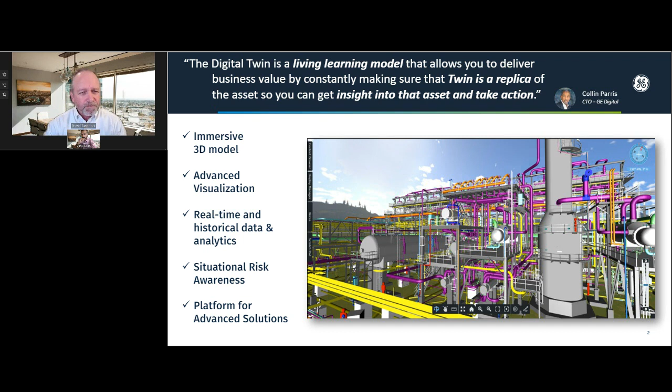And this whole platform now becomes something that we can use for other advanced solutions for other parts of the operation. So when we talk about digital twin, this is really what we're referring to from an operations standpoint. When GE and Visionaize came together, what we're delivering is the V-Suite application that integrates and provides advanced visualization in that 24/7 environment.

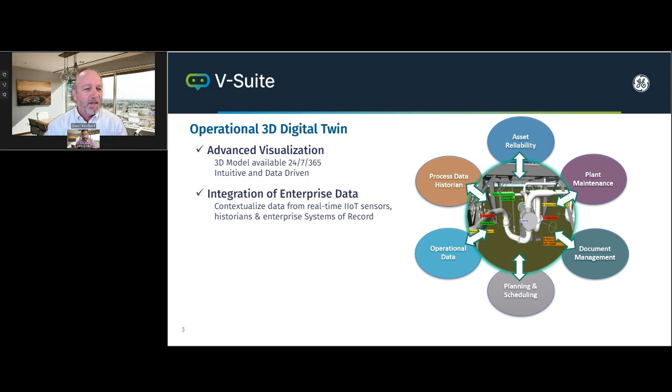So this is the operational component. Always having the data available to you online 24/7. It's intuitive, it's data-driven, and it integrates to APM and other critical business systems to provide that contextualization and the real-time awareness of different things.

This then becomes the platform where we can do other role-based things like maintenance, turnaround planning, corrosion planning, things like this. One of the things that is really important with an operational digital twin is being able to deploy it rapidly and then maintain and sustain it as the facility changes, keeping it evergreen and synchronized with changes to these complex facilities over time. All of this gives us that situational awareness, and that's what we mean by an operational digital twin and what V-Suite delivers with integration with APM and other business systems.

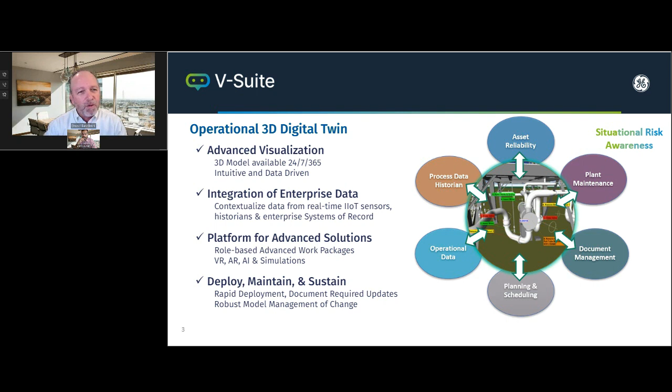So the way in which we deploy this, working with GE, we deploy V-Suite in what we call a starter. Initially, this is an integration with APM. We display corrosion loop circuits. You can locate your CMLs and TMLs, and then dynamically display and access things like damage mechanisms, corrosion rates, etc. So we can basically start small.

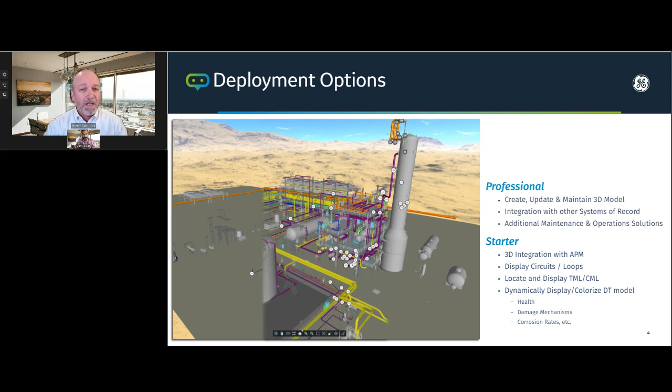We can deliver lots of great value on the starter, and then we can move this up to a pro, where we can expand to other business systems, integrate to all of those systems of record, and then add other role-based solutions like maintenance, turnaround, and other things I mentioned before.

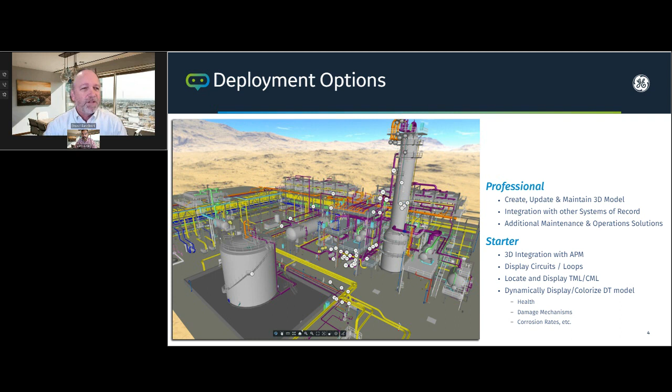At the professional level, we also have the ability to do what we call model management of change. This is where we can keep the model updated and synchronized. And then, at the enterprise level, this would be multi-site, almost a system of systems, nested twins if you will. We're also moving towards visualizing simulations, etc., at the pro level.

So we can start small, add value, and then as the solution grows or as you roll out over different locations or more assets, we have the ability to scale that very rapidly within the enterprise. So it's a great way of beginning to deploy.

So let's talk about how APM and V-Suite Visionaize come together and where we focus today and where it's going. As you know, APM has a lot of great solutions, a lot of depth across diagnostics, reliability, safety, lots of great functionality. So where we're focusing today with GE is on the integrity side.

We're focused on things like the corrosion loops, the circuits, things like this, and we're getting a lot of great traction in that area. But we're already beginning to expand that and work across other areas of data that resides within APM, things like health, SmartSignal, and other things. So that visualization really is not limited today, but today we're really focused on the APM integrity space, and that's the starter that I mentioned earlier.

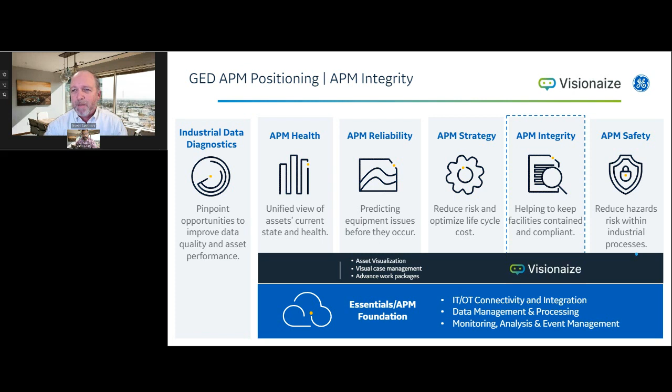So we'll give you some examples of that. Again, on the starter, we already have the out-of-the-box integration with APM, and we'll take a look at some of those use cases around risk, corrosion, etc.

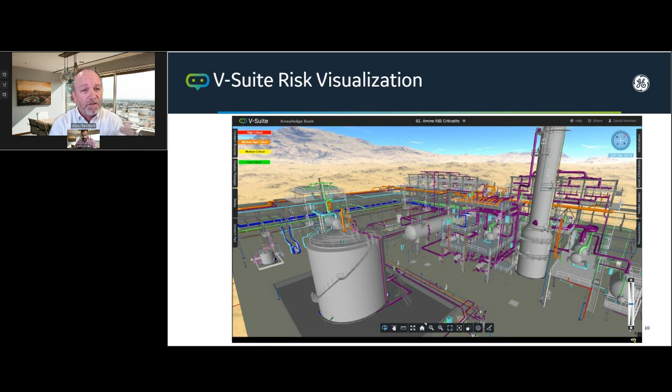Now, when we start to add the visualization, this is where the first example of where V-Suite comes in. So we have this dynamic 3D model. We can essentially query on demand that same criticality that would be coming from APM.

So we would drill into one of our asset models, and then by querying the model, we can say, okay, show me the risk matrix, show me the probability and consequence, or the different risk categories that I have in APM. Through the display manager, we're reaching in, getting the data, and then displaying that based on color codes or however the user defines it. So this is an example of how that visualization would look using the APM data directly within V-Suite.

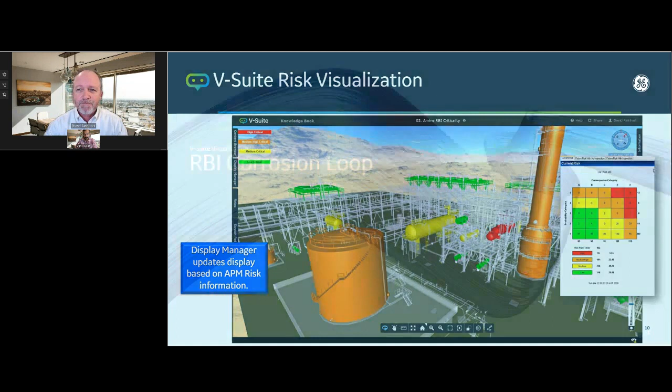So the next example we have as part of Starter would be the corrosion loop. Again, we're focused on the mechanical integrity pieces. So inside of APM, we have the loop overviews, the damage mechanism, the loop details, things like remaining life, minimum thickness. So all the good data you need to manage these assets and manage risk.

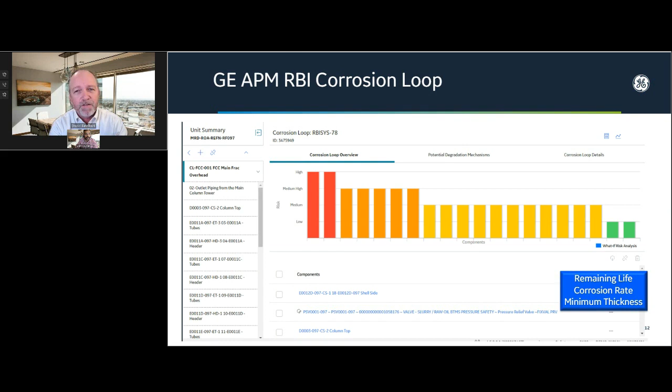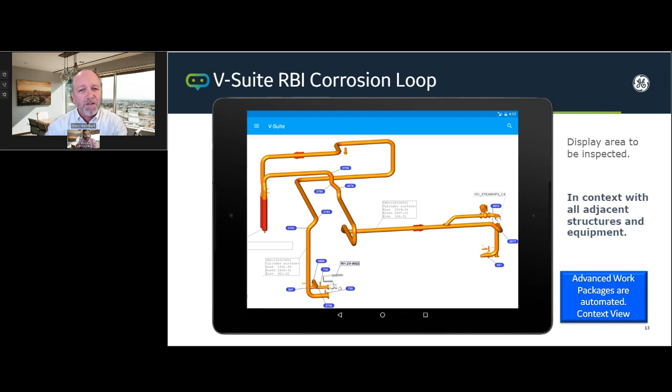Now let's take a look at that same loop inside of vSuite. We have the circuit identified, end-to-end, the dynamic 3D model that has all of the assets, the TMLs, etc. What really makes this more valuable is this data all resides within the context of the facility. So we get to see the adjacent structures, the adjacent loops, other things in the area that can help us plan, execute, and then analyze that corrosion data.

This is really important, because putting it into context with the rest of the facility, we have clients in this space telling us an hour in vSuite working this way is like 8 hours in the field, walking the lines down, tracking it, understanding do I need scaffold, how do I access it, all these kinds of things. So we're really helping them not only understand the loops, but plan that work for themselves, their contractors, and then analyze the data afterward.

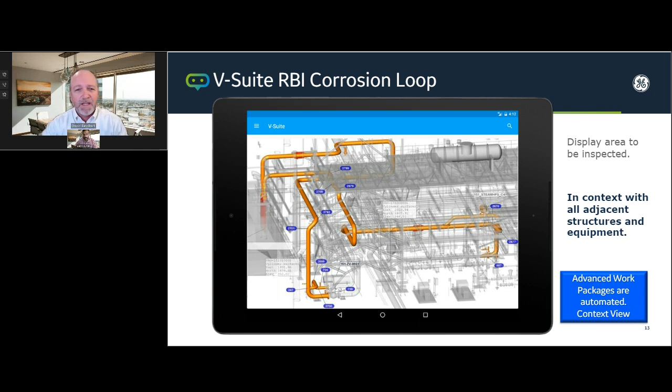Looking at the loops, we can also configure different kinds of symbology, for example different color coding to show dead legs, different symbols for things like UT and RT readings. And all of this is dynamically displayed based on what kind of work has to be done and the timetable coming out of APM.

This is part of what we call an advanced work package, and this is the contextualized view available to users on the web, either in the mobile application or at the desktop. So this is all part of that knowledge view available to the end user.

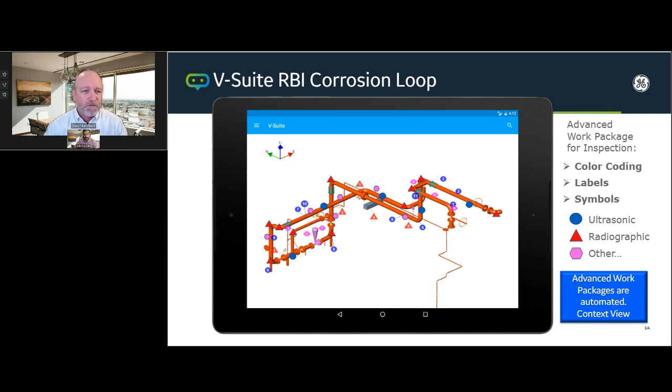We talked about it a little bit earlier. When we think about the loops, we also must think about the asset thickness data, the TMLs, those readings. We see the TML IDs, all the good data that exists, corrosion rates, remaining life, all based on the assets and based on the loops inside of APM.

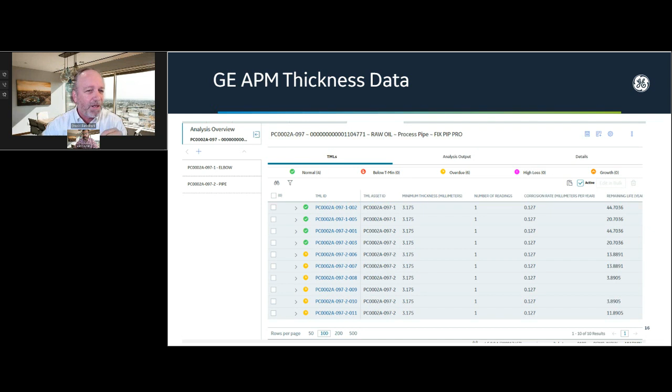Now let's take a look at that same loop, that same circuit, inside of vSuite. We can interact with the model now, and we can click on a TML, for example, select one of these TMLs, and then dynamically reach directly inside of APM and access all of that same data while viewing the circuit.

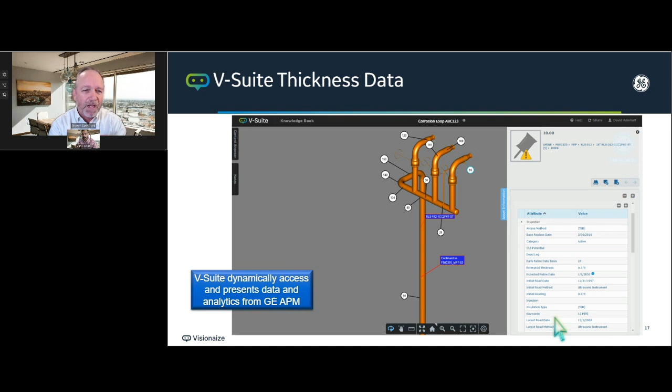And again, this can be done in real time. We're not replicating the data, so as information changes and gets updated in APM, it's automatically available in real time within V-Suite. So we can dynamically access that data, understand what we have to do, how we have to inspect, etc., all in a dynamic 3D model. These are some of the initial use cases we see with Starter.

So we'll move to some of the professional, or the pro, examples. Go ahead, Vipin. David, just wanted to add before you get into the professional, if you can go back one slide, just quick.

One thing which is really powerful is that even though in APM we have multiple modules, like thickness monitoring for managing corrosion rate management, RBI for calculating the risk, inspection for managing the findings and recommendations, one thing we can do is consolidate information. So when you're looking at an asset, like let's say this is the 3D digital twin of that asset, we can combine all the information coming from APM in one place. It could be anything ranging from RBI, TM, and inspection.

And as I said, we can expand even into the work history that is coming from your CMMS system. So you have it all in one place, rather than navigating between multiple databases. Again, consolidating information with context just makes the life of an analyst, an inspector, or a planner a lot easier than it is today. It can be expanded across multiple workplaces, and it's truly a 3D digital twin of that asset - a 360 view of that asset.

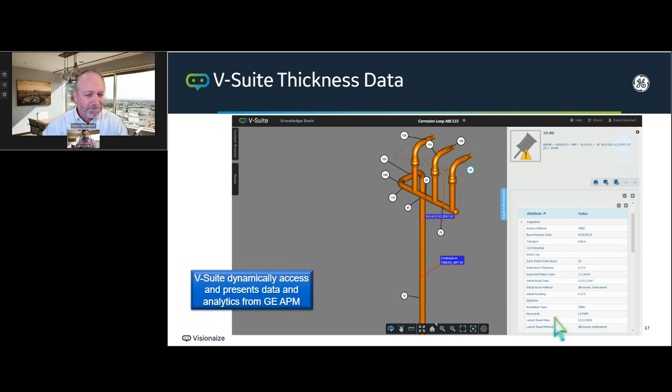Let me jump ahead, then we'll move on to some of the pro features we talked about, then other integrations. When we talk about other kinds of use cases, we really think about an operational digital twin as providing role-based access to meaningful data. It's the data I need to accomplish my work, whether I'm planning or executing a maintenance and operations routine. Maybe I'm a contractor, a new operator. How do I access the data I need to do my work and go from planning to execution, or incident to resolution? So we'll talk about some of those other use cases.

One of the first ones we often think about is an operational use case where we might look at real-time data. Maybe we have sensors or access to things like pi tag data or some IoT information. Those sensors can be placed directly in the model and integrated with that live data. And then we can visualize based on queries.

We can say, for example, show me my assets that are operating normally and color code them green. If I'm having some excursions or irregularities, highlight those in yellow. And if I'm going outside of my operating windows, highlight those in red. These are the kind of queries I can visualize, going from dashboard to really dynamically visualizing and understanding which assets are being affected, maybe which sensors are the key indicators or outliers, and what assets are being connected and affected. So this would be one of the operational access or operational visualization examples.

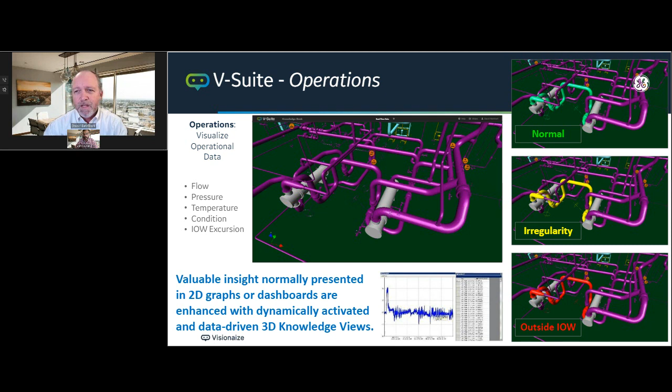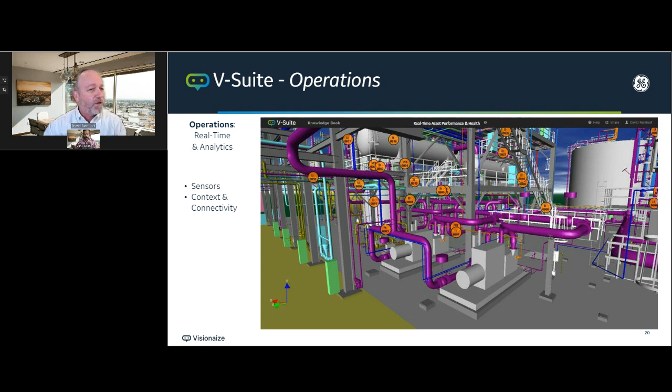Taking that a bit further, we might look at real-time data and analytics, and think about how we might work with SmartSignal or visualize other kinds of data. So when we drill into our operational model, one of the things we could do is say, show me where the tags are, and then maybe overlay that with the risk criticality, the health, or certain damage mechanisms, whatever kind of query I wanted to look at.

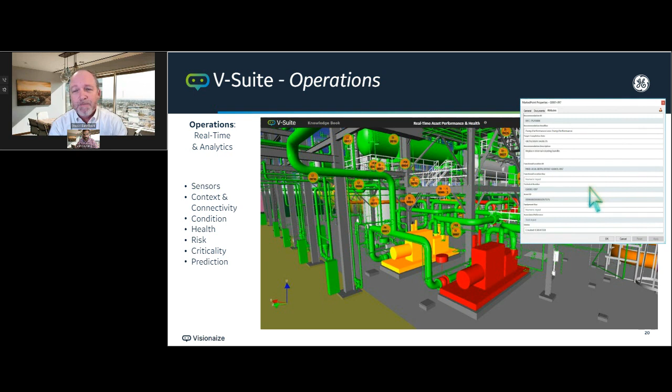So this might be a query that says, show me real-time data and show me the health of these different assets. And maybe I have some problems going on with this pump. So drilling down, I might drill into this. And to Vipin's example earlier, maybe I could reach in and get a recommendation or a prediction of failure, or some other information coming out of an APM or SmartSignal type solution. These are all the kinds of data I can bring together in a single view to really get that situational awareness we were talking about, from an operations, maintenance, or planning perspective.

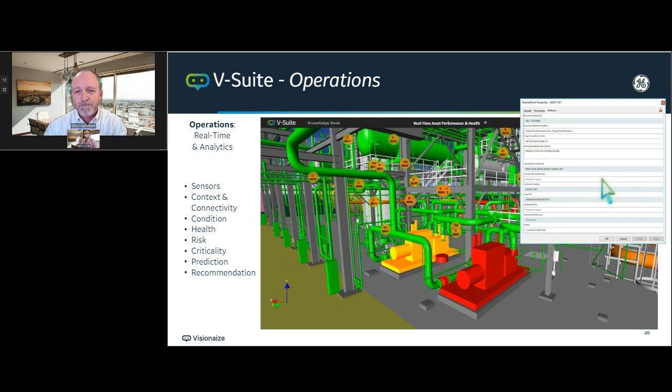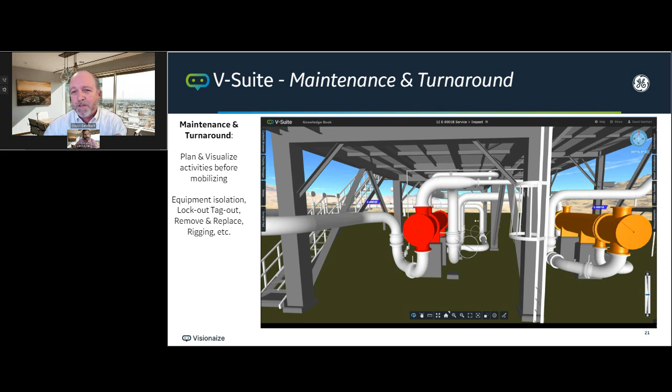As we see a retiring workforce or new contractors coming in, understanding what's the best practice when I have to maintain or work with this asset? How do I go about isolating that, and what is my procedure? Oftentimes this exists in our maintenance programs, we might have it in SAP or other applications, so what is the process to isolate this and perform that activity?

We can actually show those steps directly inside of what we call a knowledge view. We can have integrations to the interactive technical manuals or other information sources that would allow us to have certainty with which we would go about and make those maintenance activities.

What I like about this example is this exchanger here is color-coded red, there are some issues with it. But we can see the exchanger right next to it is already color-coded orange, there's beginning to be some problems. So the planner might look at this and understand, hey, if I'm going to service this one, I'm going to have people, resources, and production halted for a while I do this work—we might as well do the one that's adjacent during this planning phase. So I get that context and I'm able to do that.

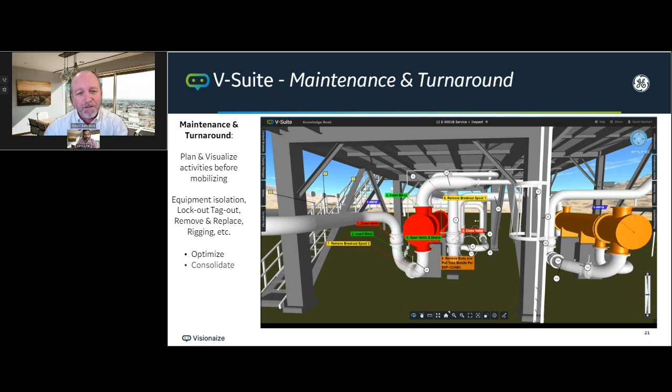I can also look at maybe the TMLs in this area. Since I'm going to have these pipes out of service, I might as well inspect those. So that's all part of that knowledge capturing and sharing, extremely intuitive and consolidated within the digital twin to facilitate things like turnaround planning or regular maintenance activities.

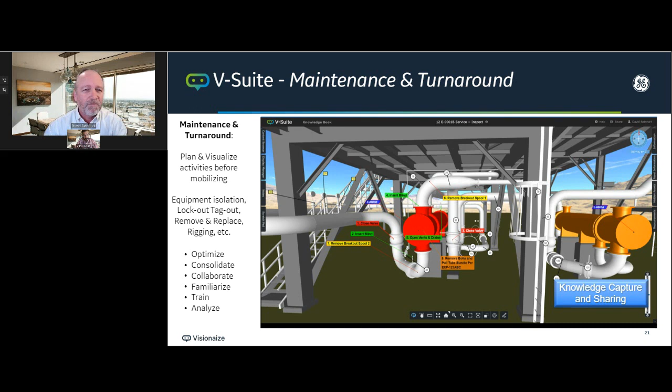So when we look further at those two exchangers, we can also reach into other kinds of data. With these, we support what we call temporary assets, and these are also data driven. So when we think about planning activities around these exchangers, one of the things we might need is scaffold.

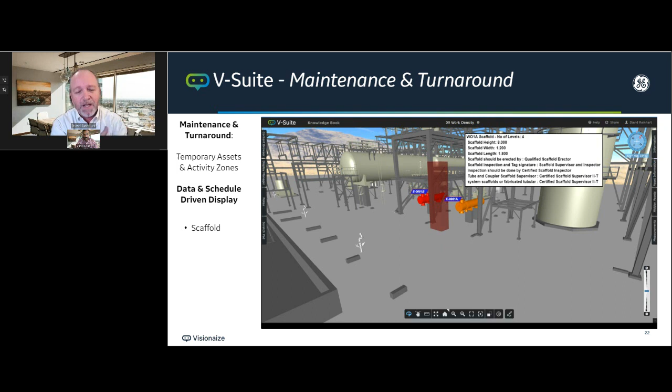With our maintenance module as part of Pro, we can locate scaffolding and have those locations tied to a schedule. So if the scaffold is erected and signed off, it can be visualized in the 3D model, and then we can see, okay, I have some scaffold here. I might also want to run a query that says, show me other inspection or other activities I might have planned in the next 6 months that I could take advantage of this scaffold and use that today.

So now I can begin to consolidate activities in a way that would help me optimize my execution, so I spend more time working instead of planning or moving scaffold from here to there and then back again in 6 months when I need that activity.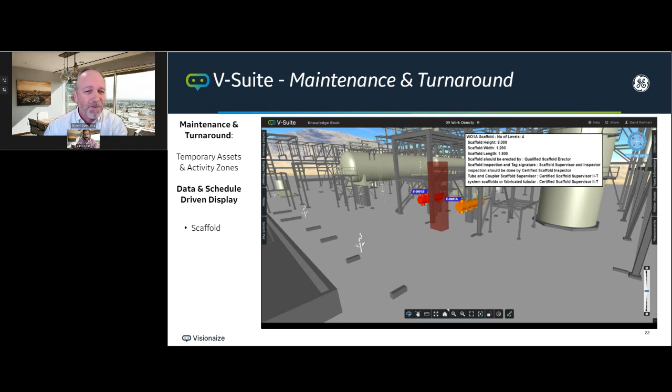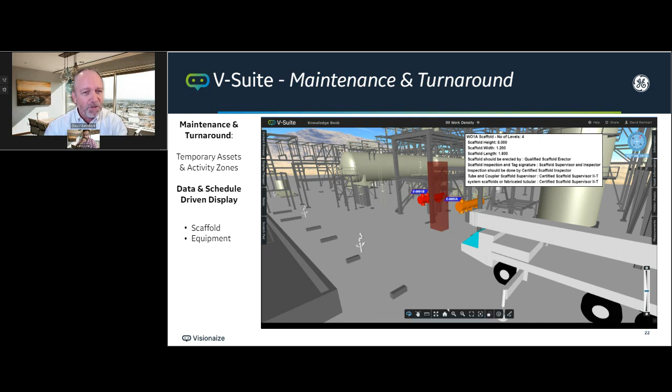Other kinds of things we can display through temporary assets would be things like heavy equipment. If I have certain equipment in the area, this can be located and shown as a temporary asset. We can move it around, show where the boom is going to be, make sure we have appropriate clearances—again, all part of that maintenance turnaround so I can communicate to my team and do my planning.

Something else we can do is tie physical work areas or safety zones to the model, and we can visualize, maybe show in green areas where I have low activity, yellow where we have moderate things planned, or highlighted red where we have heavy equipment or maybe some x-rays or other hazardous activities going on. So I can see right inside the twin these different functions. Before I mobilize, I can have a better sense of what's going on in the field and plan it, or mitigate potential pinch points or hazard areas by working around it or accessing things differently.

We have many clients actually tying this kind of visualization directly to their turnaround planning or maintenance schedules, and part of their daily stand-up meetings, viewing the model and having a real sense of what's going on in the field before getting the hard hats on and going and signing into the control room.

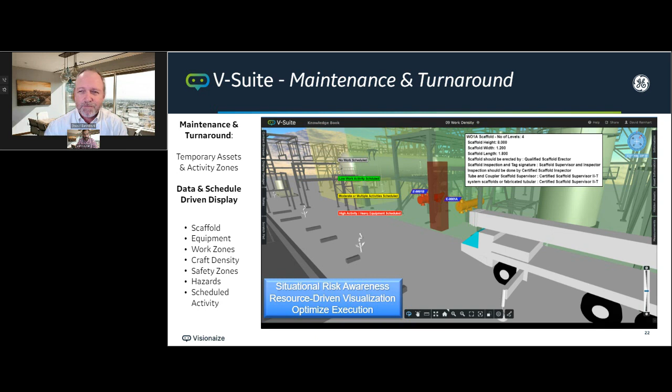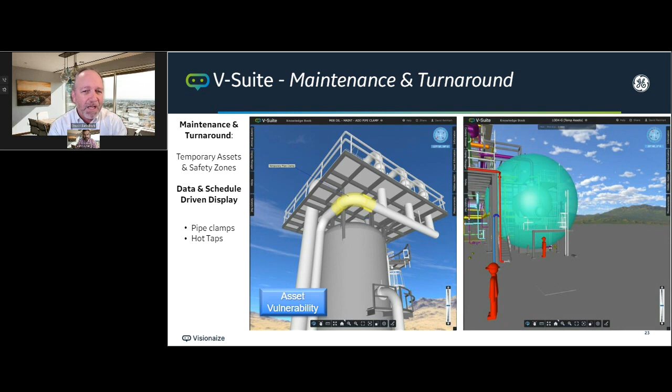Other kinds of temporary assets that would add value would be things like hot taps or pipe clamps, things that give us a sense of where we might have some vulnerability in our facility, or other things going on in the site that provide situational awareness—things like a radiation zone, a blast zone, high noise areas, the nearest safety showers, egress routes, shelter in place. All of these can be shown as temporary assets and highlighted and displayed in different workspaces or views, depending on the activity involved or needed.

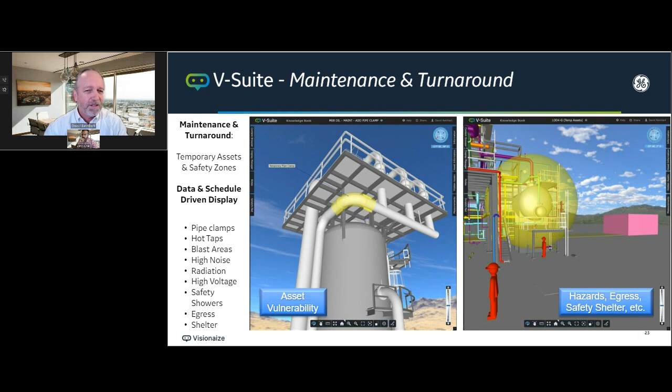And so again, all part of the maintenance turnaround, things that can be supporting those different kinds of planning and execution phases of work, we think about different activities. Of course, documentation is also important. There can be documents in all different kinds of systems, including APM.

Imagine just clicking on an asset and saying, show me the P&ID for this circuit, show me the operator manual or the data sheet, give me the interactive technical manual for this process. Through integration with document management programs, even unstructured data, we can reach directly into those documents from the 3D model and access the things we need to do the planning and execution of these critical activities in a very efficient way.

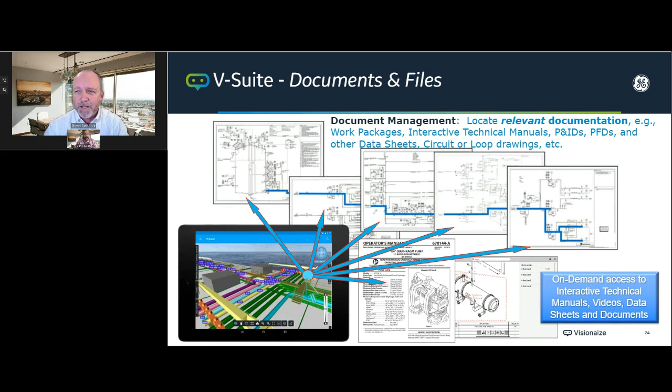That's part of being a true operational digital twin. So, if I had to summarize it, what is that operational digital twin? We talked about it a bit before. It really begins with pairing the physical world with a 3D integrated operational model, and then contextualizing and integrating it with all that good data from APM, data lakes, data warehouses, documentation, sensors, edge computing, even AI. All of this comes together, and it all ties back to that asset, to the physical facility, the assets we're working with.

And the way in which we need to work with it - if I'm the corrosion engineer, I need to see circuits and loops. If I'm the maintenance manager, I need to understand work zones and schedules. So it's important how that integrates.

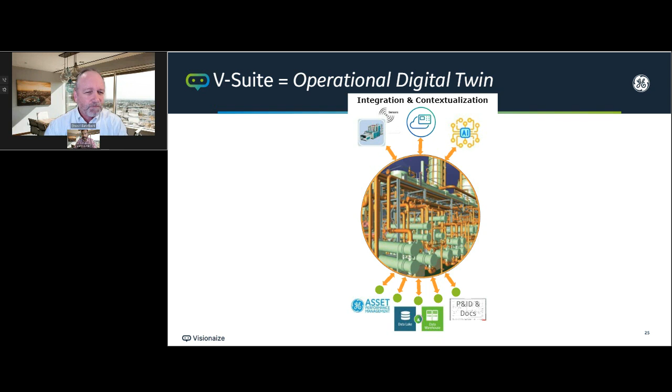Now, how do we get there? It's important, as I mentioned early on, that we can build this out rapidly and deploy it. So what we can do is take engineering CAD models, things that have been used for decades for the design build phase, and upgrade them and get them ready to work regardless of their source, in the way we talked about today.

And where you don't have facility models or engineering files, we have robust tools right inside the software that consume things like laser data, LiDAR information, scan and drone information, bringing all this together to not only create a very accurate as-is 3D model, but then maintain and sustain it. A mix of these over time allows us to keep that model evergreen, without ever taking it offline. That's part of the secret sauce we deliver - the ability to robustly deliver this and maintain it in an environment that's also ever changing.

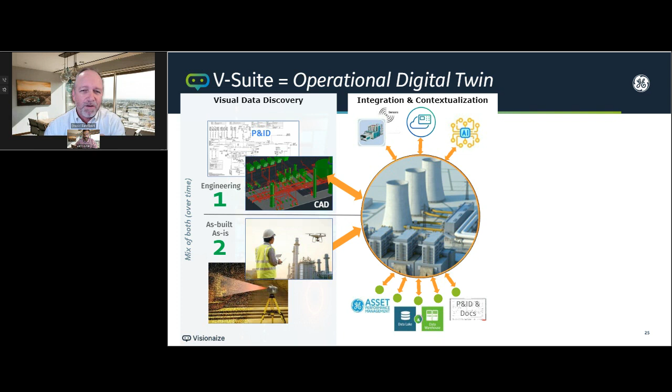And the other part of that secret sauce is delivering that in a role-based way. If I'm an APM user, I want to see the circuits, my 3D work package with my corrosion loops and my TMLs. If I'm the maintenance manager, maybe I want to see my different work zones and my hazards and the things taking place. And something we didn't talk about is how do I consume that?

We can deliver this on-prem, we can deliver in the cloud, we have virtual reality and augmented reality solutions. So you can consume the data all from that same digital twin in a way that makes sense for your use case or for your users across operations, maintenance, even supporting engineering, because now that we have a living model keeping current with facility changes, we can also use that as part of that next turnaround or upgrade or revamp. All of this really fills in and delivers that operational twin.

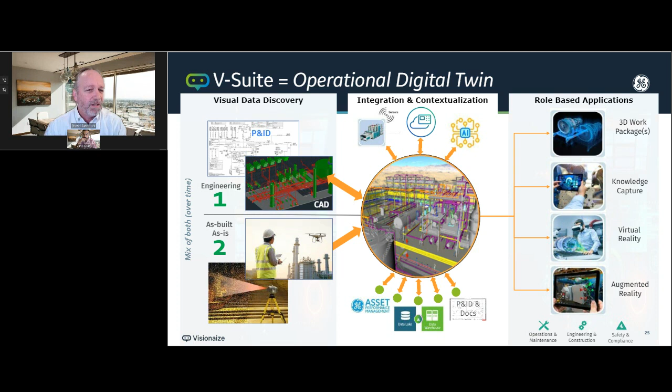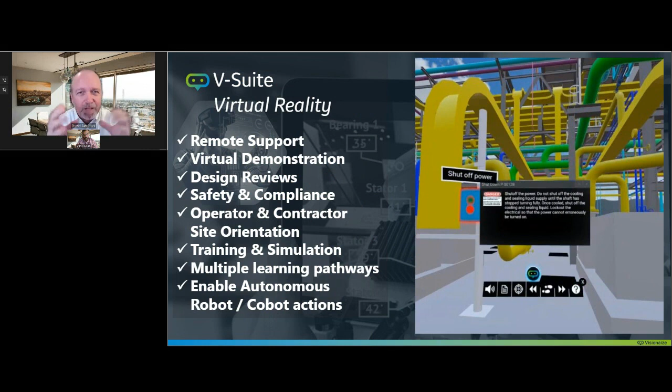I'll dig a little deeper on the VR side, because this is an exciting piece of digital twin - really being able to do things like remote support, design reviews, review things in a very immersive way. And I have to confess, until I really experienced a digital twin in that immersive environment, where I could put the goggles on and walk around inside the facility, I didn't fully grasp how impactful that could be to my retention of the facility, my understanding of what's going on.

Inside of V-Suite, we have Vizzy, our digital assistant, that can take the user from place to place and show you the procedures. And with a scenario builder, you can do this yourself and set up how to capture that knowledge and then share that with other users within my community.

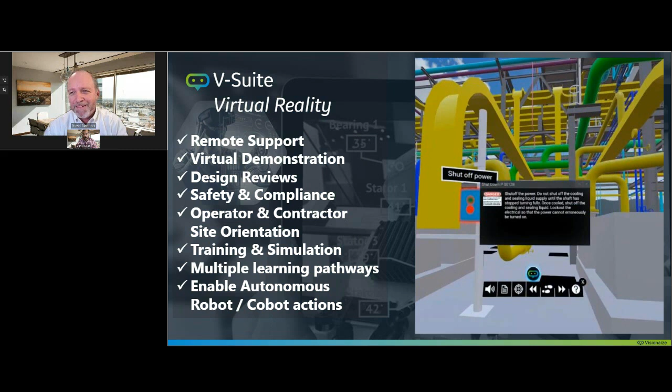And pulling all of this together, again, this really is the operational digital twin. This is how we've come together with GE to add value to not just what APM is, but other digital systems that you're using today, and things that you have planned going forward. So I think with that, I might turn it back to Vipin and see if you have any closing thoughts, Vipin, or if we want to open it up to some Q&A at this point.

Yeah, first of all, thanks, David. I think it's been really informational. And I think, again, it's important.

When we started the journey, as you're aware, we started this journey with simple mechanical integrity use cases where the analyst can visualize the corrosion loop, the inspector can look at the thickness monitoring location. But once we discussed it with our end users, the opportunities are much bigger. They are already looking into it from a turnaround planning perspective. So we all know when it comes to turnaround planning, the different types of information which are key for success - you have to be aware of all corrective actions, like clamp removal, to any RBI-related recommendation for inspection. The span is so wide. So one is having that entire view of what needs to be done and what are the critical activities that you need to track, and managing that with the planner, to have a very optimized turnaround tool.

That use case is pretty powerful, David, and I think you delved into it, and I find it a very powerful use case in general. So what we saw just as a reliability or integrity use case can be expanded into an entire turnaround planning scenario, which I think is absolutely powerful. And with that, I just wanted to get your perspective - don't you think so? That is the power, right? Just being able to expand it from a small use case to that big a use case like turnaround planning is pretty powerful.

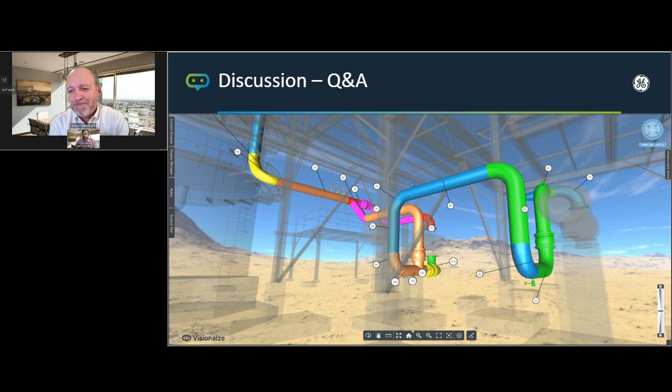So the first question is, there are a lot of competitors coming up now - this is the new buzzword about 3D digital twins. A lot of them have the same capabilities, if you may. But what makes you different, or Visionaize different, in this perspective? How would you place yourself as a differentiator?

Yeah, I think it's the right question. Anyone looking at digital transformation - these are the things, and now digital twin is kind of all the buzz. So what does it mean? How do I operate it? And so I think there's a couple of key areas that really make us different. And I know it's why we came together as GE and Visionaize, because you've done the research yourself.

The ability to create that twin and have it be fully utilized in an operational setting really required a ground-up development, making software that works in an intuitive way where you don't have to be an engineer or somebody with 10 years of 3D experience. Someone with a mouse understands, oh, that's an exchanger, I can click on it. What's my APM reliability data? Show me that, let's visualize it, and just being able to work with data in an intuitive way in these different role-based manners is what we deliver.

The ability to maintain and sustain that, to create it and then keep it alive, keep it evergreen with the facility changes is absolutely critical. We can get a lot of value from a twin or from any digital transformation, but if I can't keep it current with the data, then I begin to lose value and I lose trust in it. We spent a lot of time making sure that we can maintain and sustain that model and deliver it in a role-based way that I'm certain is unparalleled. That's really part of what makes us different and why we're seeing so much traction with great marquee clients around the globe.